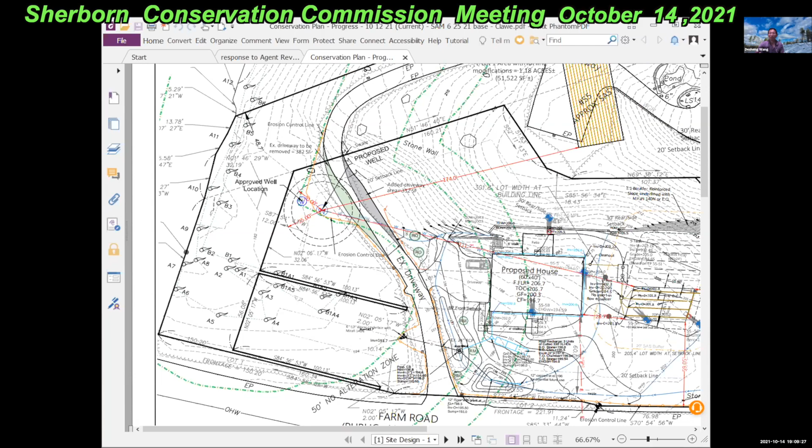So what you see is lot number 2, that's the property line, and the property line goes all around here. And this is the existing driveway to the existing house at 55. We are proposing a new house at this location with the driveway coming in off the existing driveway.

If you're looking at this green line, this is a 50-foot no alteration zone, this is the 100-foot wetland buffer zone, and this is 125. So you can see the house and the septic system are far away from the wetlands, and pretty much all the activity is on the east side of the existing driveway, except a minor modification, which was already consulted with Joyce, the agent.

The reason is the original approved NOI for the well serving this house had it at this location. It happened there's a tree there, so if we drill that, we have to cut that tree. So if we move about 12 feet east, we can avoid any tree cutting. And at the same time, we have to meet the Board of Health 20-foot setback to the driveway, which will push in this driveway.

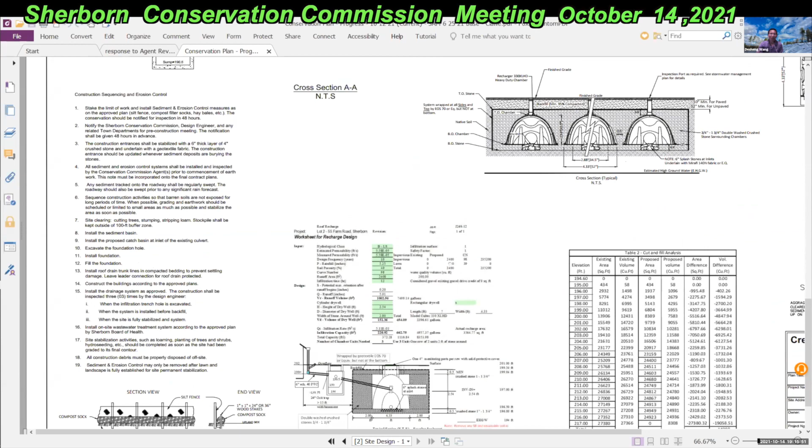So we are proposing first to install erosion control around the west side of the driveway, because there's some traffic coming in using the existing driveway. We're going to install the mud trap, riprap, which is shown in the detail - like 2 to 3 inch, or even a little bigger size stones, so that the mud is not going to escape on our side.

And then we'll get the sediment basin installed and this catch basin installed. As soon as we install and grade this area, we will seed it right away, hopefully to promote growth before we move on to the septic and foundation construction.

So at least for a while, depending on the time - if it's in the winter time, we'll probably have to use winter rye and mulch this area. And so when the foundation hole is open, until the roof goes up, that foundation hole is probably going to hold some runoff and not cause any issue.

And the same thing for the septic system - this is going to be flattened out with sand fill, so this area is going to act kind of like a runoff sink. Any water coming in will be trapped there. So we will see what the conditions are.

So for the whole yard work, we can hold on until we get this done and get this swale and sedimentation control area stabilized with the growth of vegetation. Then we can finish the rest of the yard.

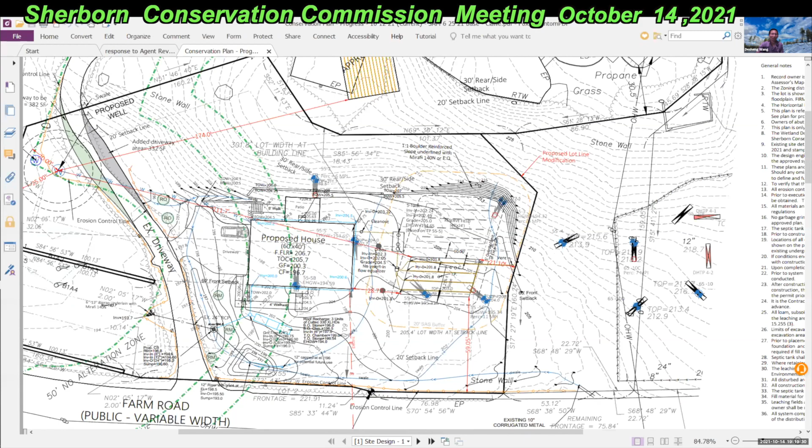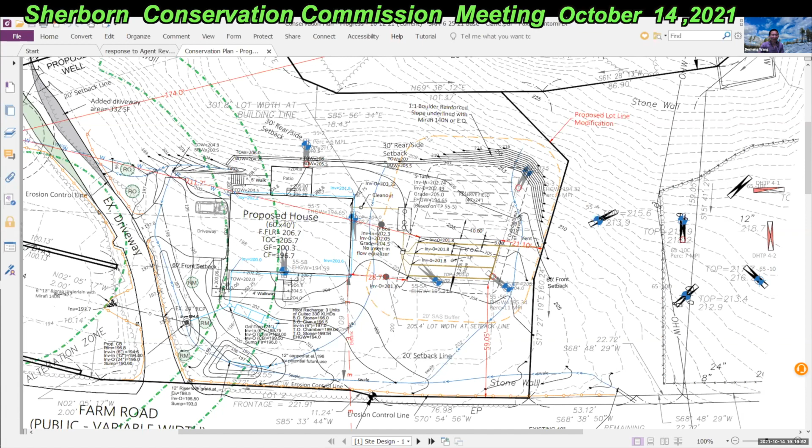For the erosion control barrier, we originally proposed a silt fence and straw wattles, and Joyce recommended changing that to 12-inch compost or chip socks, so here it's replaced with 12-inch compost socks.

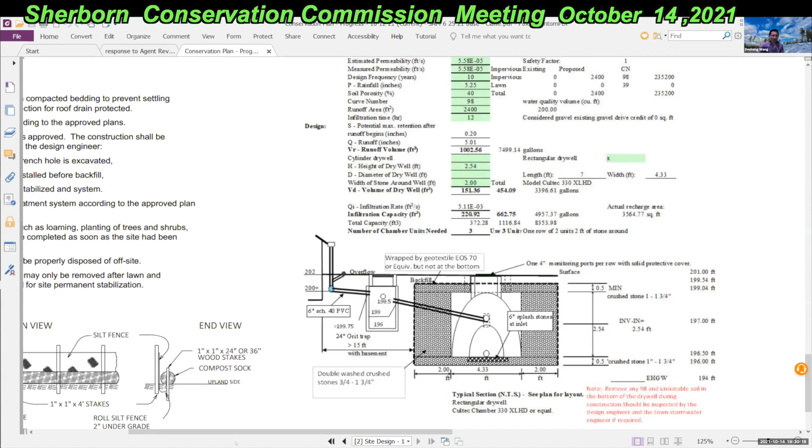We changed it. It's up to the commission if they want us to change it back, because with so many erosion control features and the sediment basin put in, I think the straw wattles are easier to install and maintain, in my view.

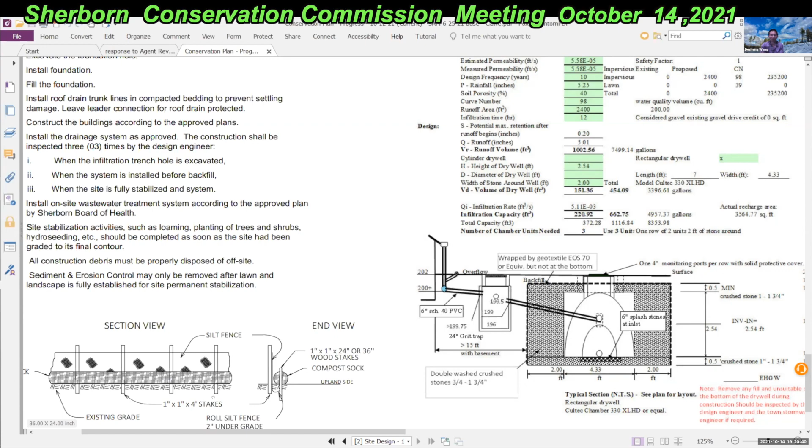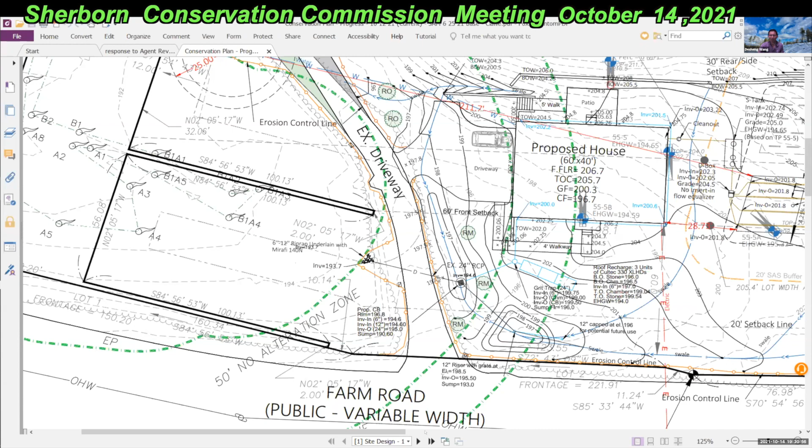But most of the things would be contained on the east side, with all the swales pre-constructed and the sediment basin installed. We did put it all on the plan. So on this side, the east side, we have the erosion control barrier, and on the west side we have it too. So it really runs through the whole front construction area.

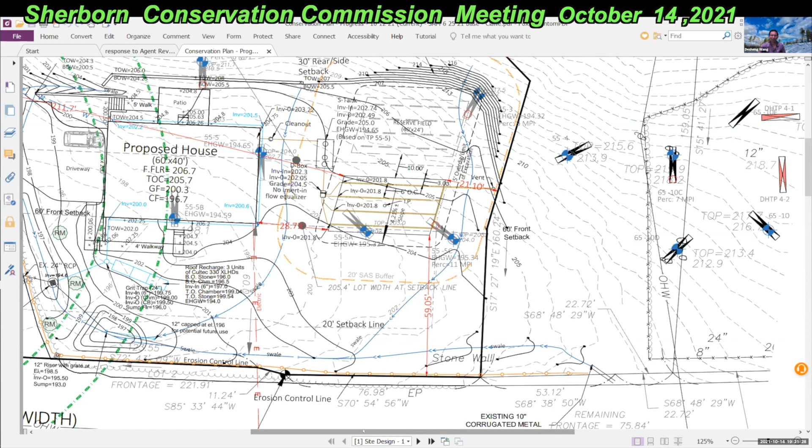Given that, right now there's probably not going to be any runoff until it fills up at the beginning, except for this section which is still higher than the sediment basin. So we're not expecting much of anything coming toward Farm Road, and Farm Road should be able to stay very clean. The only thing coming would be from the entrance, which is quite a distance away, over 100 feet. Plus we're already going to install the trap rock mud trap here, and we'll keep it as a sub-base for the new driveway.

So Joyce, is that covered? Desheng did address the comments that I had.

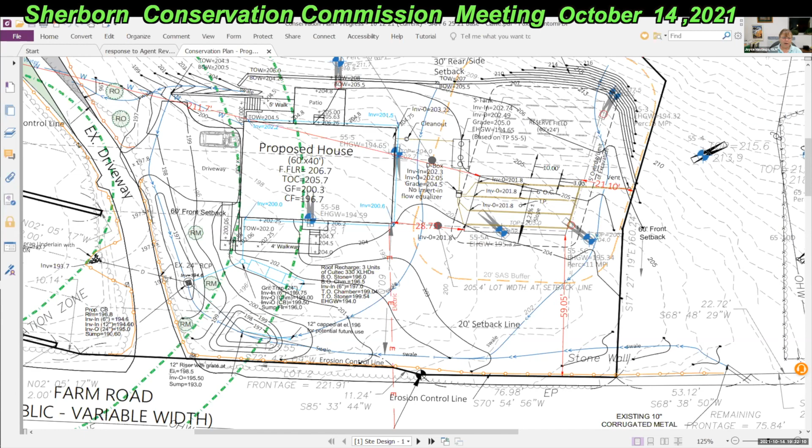My concern is that directly across from the driveway there's a little swale, a scupper in the driveway, so anything coming off the driveway would be directed straight toward the wetlands. So I do think the erosion control on both sides is important, and that the driveway be swept. There are notes, and we'll put it in the conditions too, that the driveway and street need to be swept daily or as needed, so we can keep any debris on the driveway from going across the driveway and into the wetlands.

I like the idea of the settling basin that he put in there. While it's extra for a single family home, I think it's warranted for this, again because of the direct conduit between the project on one side of the driveway to the wetland swale, the swale that goes right to the wetlands on the opposite side of the driveway.

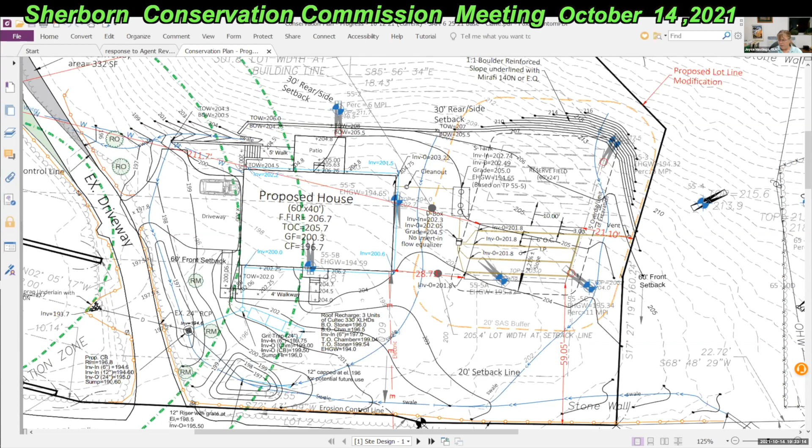He also added to the plan, as I asked, a volume of material that will be brought in for fill, and a table of activities in the buffer zone. That's also been added to the plan.

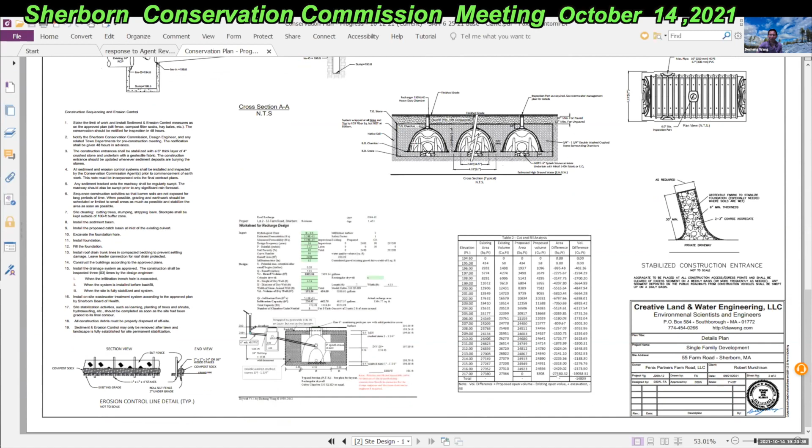Right, a disturbance area table breaking it down between the different areas of the buffer zone. We provided the volume cut and fill analysis at each elevation, so in total we are going to have roughly 500 yards of fill that needs to be brought in.

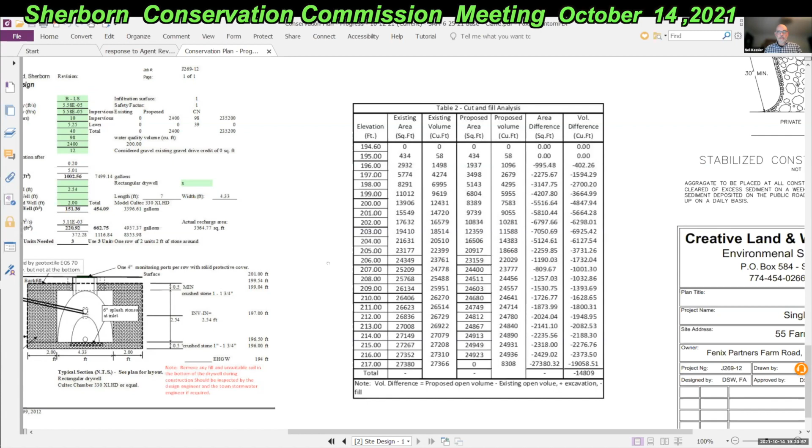Michael, go ahead. So I guess, Joyce, you're okay with the sizing and the calculations, that basically whatever calculations were done for the stormwater management are reasonable? I believe they are reasonable for the single family dwelling, yes. Okay, I just wanted to confirm that.

Then my list of some things: given that there's fill, one of the conditions will be meeting the wetland regulations we have about fill. Section 5.3, I believe, will be part of the conditioning, as well as about stumps. There's fill and stumps in the regulations that will be part of the conditions in terms of the quality of the fill. I think you've seen that before, Desheng. So that would be part of the conditioning on the fill being brought in.

I guess we'll have, I see that there's maintenance of the outfall in terms of the riprap there. It's outside the 50, and we'll have a condition to check that outlet for sedimentation and any erosion. So that'll be a condition we would want. And I think, you already have it, including something like maybe an annual report on that condition, so we just know it's being monitored, that there are no problems coming out there, even though it seems very unlikely given the volumes.

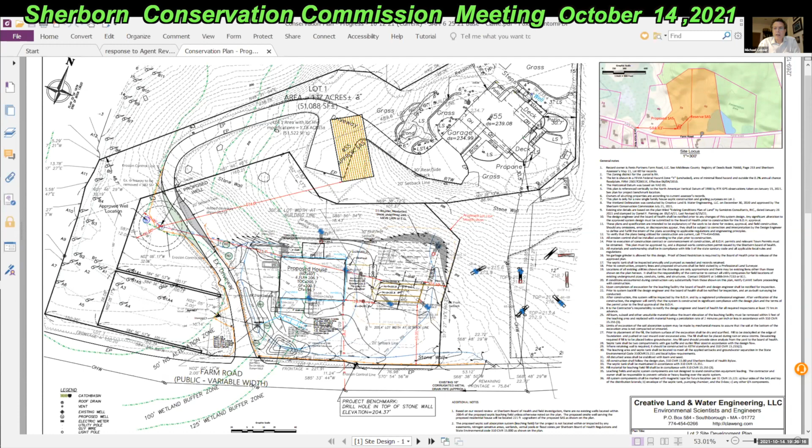Then the remaining issue I have is more on the mitigation. Basically you're creating, and I can't tell that number, 1,370 square feet, whether that's the area of the new driveway, I'm presuming. What I'm curious about, in terms of mitigation, you're cutting trees and substituting trees, albeit fairly small, but what I'd like to know is about the areas in the outer buffer zone that are below the driveway or south of it, where that goes towards the catchment.

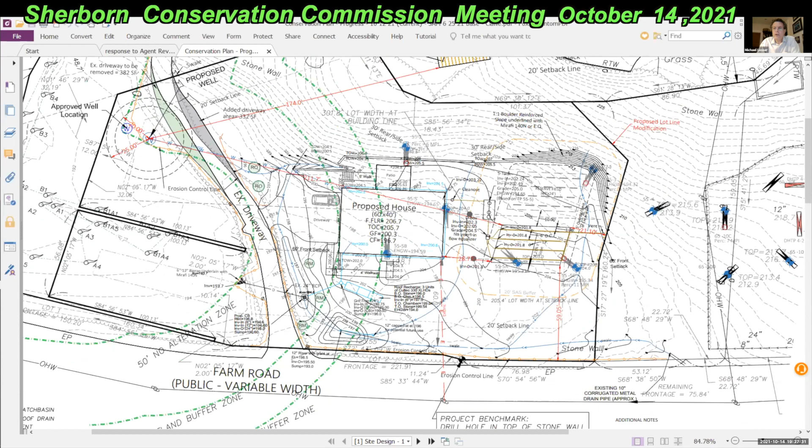There's that pie-shaped area below there that'll have a bit of work done. And a little bit above, what work will be done, and whether the invasives — there was some talk about cleaning up invasives — whether those two areas in our jurisdiction, in the outer buffer zone above the driveway, is there going to be any work? I'll start with, is there going to be any work north of the driveway, or will that be maintained as a natural buffer, as well as the area south of there? I could see it being improved as mitigation.

That area south for sure has a lot of invasives down towards where the catch basin is. That whole area could be cleaned up and some native plantings done there as part of mitigation for the driveway. Yeah, sure, there's lots of bittersweet. I don't recall there's much of here.

You say the north of that? No, I'm just wondering — they're two very different areas. I'm wondering whether any work will be done north of the driveway, or whether that area in our jurisdiction will remain native buffer, that you're not planning any landscaping north of there. We'll start with the north part, whether you're planning any landscaping at all in the buffer zone north of the driveway, or whether it will remain native buffer zone as it is today.

Natural. There will be like a swale. Are you talking about this area? Are you talking about to the left of the driveway, Michael, as we're looking at it? No, I'm talking about the new driveway, to the right of it, north of the new driveway. Thank you. Right, yeah, I have no issues with the existing driveway and the change that's being made. I mean, they have to do that, and that cancels out, and I don't have any problem with the well change there.

It's just a matter of, I'm just trying to deal now with the new driveway — the fact that there are going to be 2 trees planted. Bob, you can chip in to see what you think. So we haven't really developed exactly what is going to be planted, but I would assume there's going to be some ground cover, worst case a lawn, so definitely it'll be seeded after the trees are planted, and it will be lawn or have some kind of flowering beds. Well, that's what I'm trying to get at.

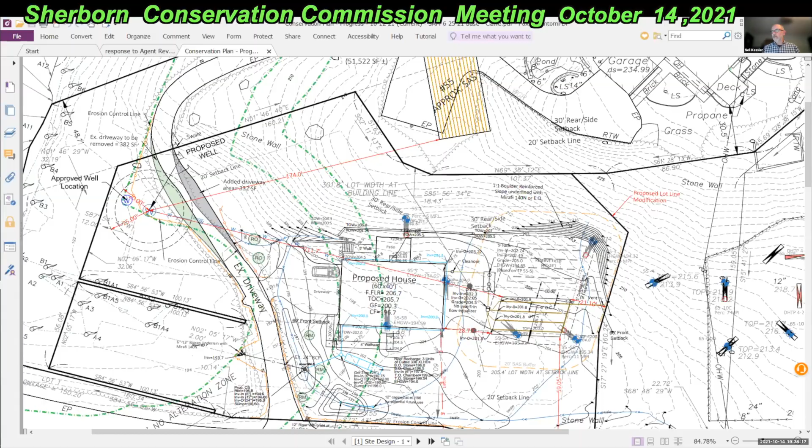Okay, and we now have a request for determination for 34 South Main Street. Joyce, I was looking in the Dropbox and I didn't see necessarily a write-up from you. Have you had a chance to look at what's being presented?

Yes, and we talked about it briefly in discussion at the last meeting. My conditions would be, yes, I did look at it, to access the project from the opposite side of the house. They're redoing the two existing structures sitting on the ground right now. They're partly in the 100-foot buffer zone. There's a deliberate, very clean retaining wall between the structures and the wetlands, or the lawn below the wetlands.

Between the wetlands and the two sheds, we just wanted to be clear that no activity would come up the existing driveway, that it would come from the far side of the house. We talked about, because that's kind of where you were driving now, across the lawn, so that you're not bringing construction material up the existing driveway, up the stairs on that wetland side, on the driveway spur that was just constructed, and coming around from the other side of the house.

Okay, the applicants are looking concerned. Can you... that's one of the conversations that we've had. I think I met on site, I've spoken with the owner, so is that a concern for you, coming from the opposite side of the house rather than coming straight up the driveway?

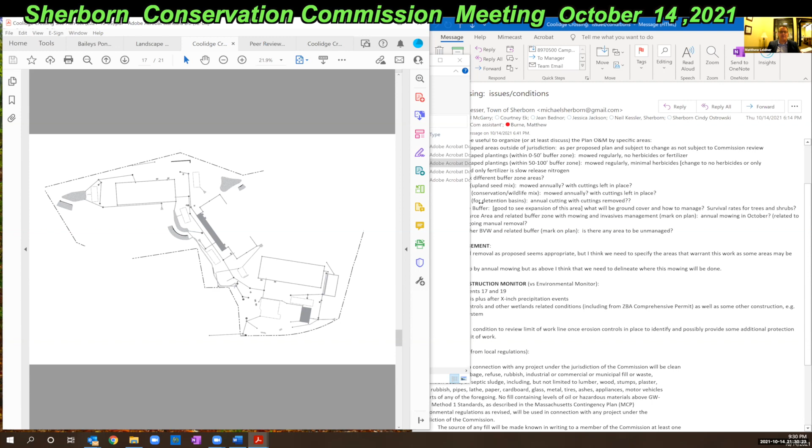Well, the vegetation, okay, no, that's a good question. There's really two parts to the wildlife corridor, as we're calling it. One is the tunnels or passageways - one goes under the road, one goes under the sidewalk. Those are what are addressed in the stormwater O&M plan, the actual concrete structures with grates on them, the tunnels.

The landscaping itself along the corridors leading up to the tunnels and between the two tunnels - we have that on the landscape plan, and we worked with Hawk, the landscape architect, on this. We have maintained areas that will not be manicured. They will be left to naturalize and only be maintained once a year. There's a specific seed mix. We're not proposing planted shrubs right off the bat in this corridor, we're proposing a seed mix, which is on the landscape plans, with less frequent maintenance of that area.

So once a year, just knocking it down to keep any saplings or trees from growing in that area, but not manicured. Matt, if I could, through the chair - to answer Carol's question, this newest plan has additional plant material as further mitigation within that buffer zone.